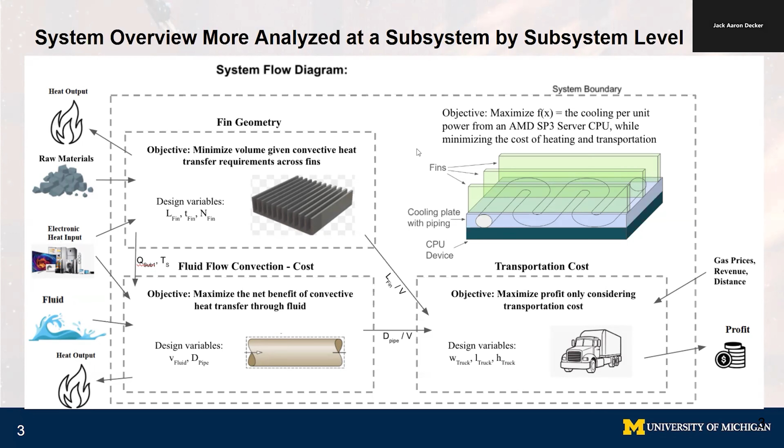Next up, we're going to talk about our optimization model. Here's a hierarchical decomposition of the transportation and heat transfer system. We have the two lower level subsystems, fin geometry and fluid convection, leading into the transportation subsystem, which gives a profit. We have a target profit set, and we're adjusting that.

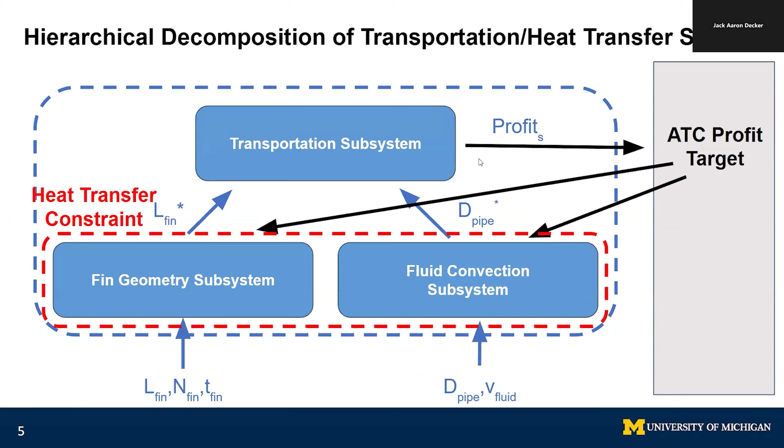We're taking that response and adjusting our two lower level subsystems accordingly. We'll talk about this in more detail later. For now, here's a breakdown.

We have our transportation subsystem, with our profit target that we're setting, and our response, which is our observed profit. Design variables are L-fin and D-pipe, which are outputs from the lower two subsystems, which have local design variables: L-fin, N-fin, T-fin, V-fluid, and D-pipe.

Our response to that is categorized here by L-fin star and D-pipe star. And our design variables up top are for the whole system.

Our ATC objective function consists of three terms, basically one for each subsystem. We have weights associated with the geometry and convection subsystems, just to tune those. Basically, each phi function is trying to minimize the target to response variables.

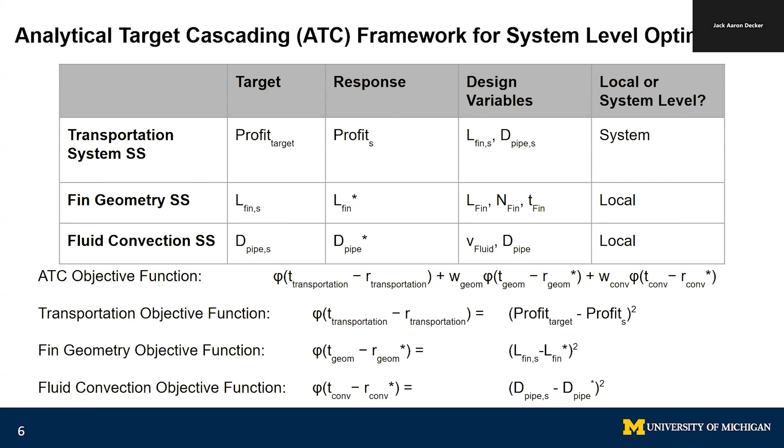More mathematically explained here, we're trying to minimize the ATC function, which we just plugged everything into above. We're subject to the constraints of heat transfer, which we'll develop as a surrogate model a little bit later.

We also set profit equal to this term here, based off of two terms: revenue and cost of carbon emissions, based off of L-fin and D-pipe. We just set each of the terms for one in this example. A theoretical format is explained here.

Our objective constraint trade-off: the objective seeks to primarily optimize profit, especially given the weights that can be tuned for L-fin and D-pipe. The weights being lower would put a lower emphasis on the heat transfer constraint, so the company can choose to optimize more profit at the cost of the quality of the product, though that's not necessarily recommended. That can even be flip-flopped if you want to.

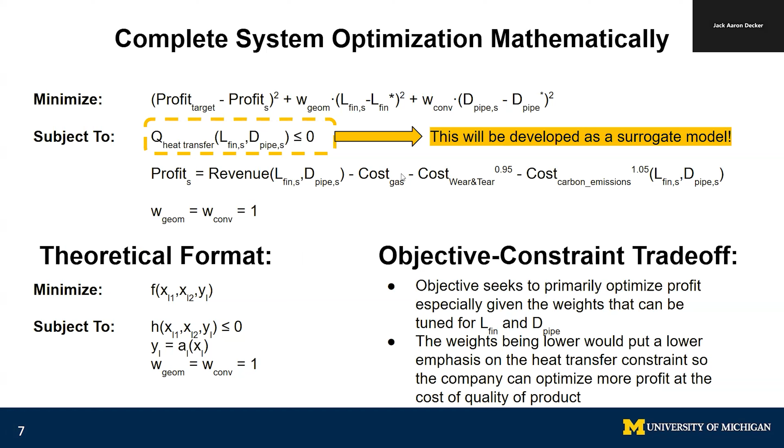This table reviews some of the differences between system level optimization versus subsystem level optimization. First, at the system level, the primary goal is simply to optimize profitability while balancing and ensuring heat transfer parameters are still met. At the subsystem level, each design variable is optimized locally and then passed along to the final subsystem, which creates suboptimal performance from a broader perspective.

Additionally, at the system level, the weighting of the design variables is malleable, various variables are backpropagated, and heat transfer is handled at a system level, all of which allow subsystem 1 and 2 to contribute in the most efficient way towards improving profitability. In the subsystem level optimization, each subsystem was internally trying to optimize and pass along variables, which created a strong design but left room for it to become even better.

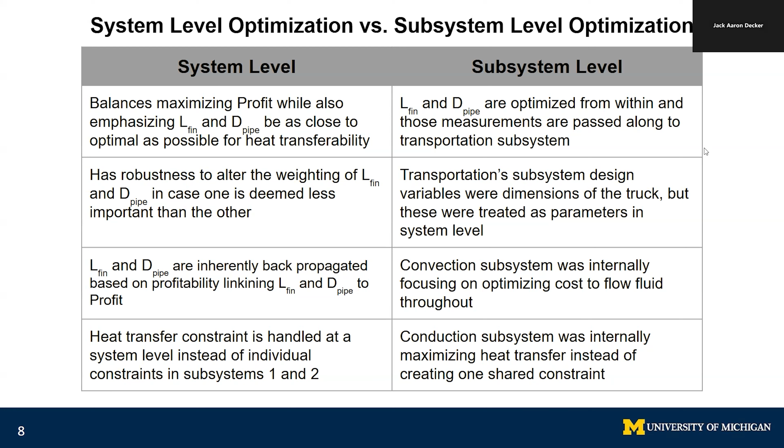This slide gives a list of all the parameters used in our model. These are taken from each of the subsystems and compiled for use in the system level model we have built.

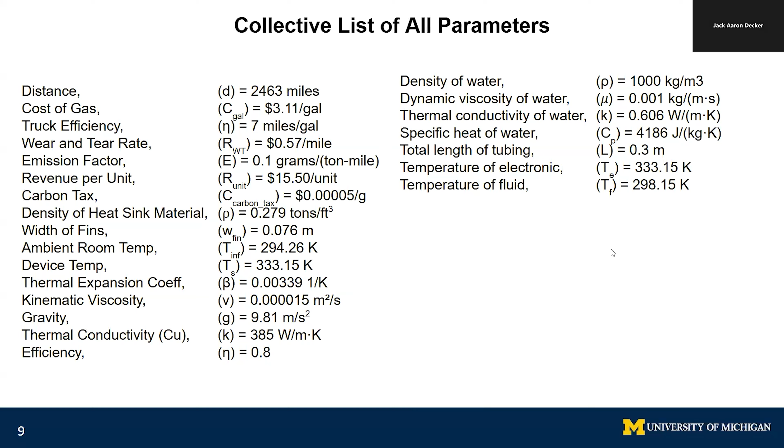We will present the mathematical modeling we performed with the use of these parameters, along with the design variables and constraints we selected next. Next up, we're going to talk about the mathematical modeling.

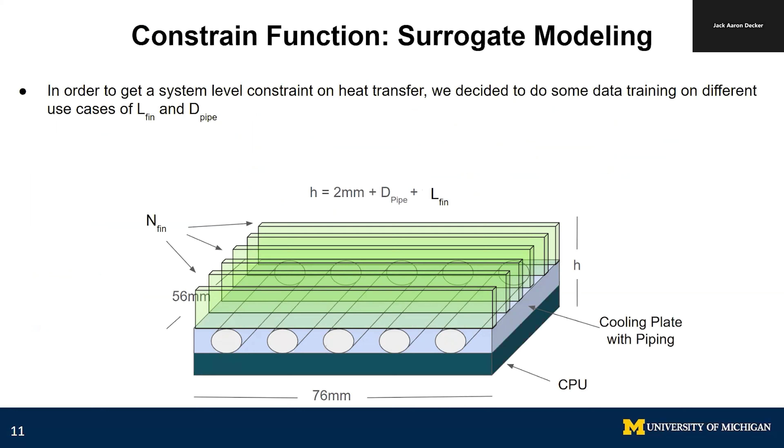To start, we'll talk about this constraint function. We did a surrogate model for this. Here's a visual of our heat sink. We're keeping the base area dimensions the same, and we are changing the height, which is based off D pipe and L fin.

To do this, we created training data from heat transfer theory, which we'll talk about more in future slides. We took various combinations of L fin and D pipe and calculated what the Q allowable would be.

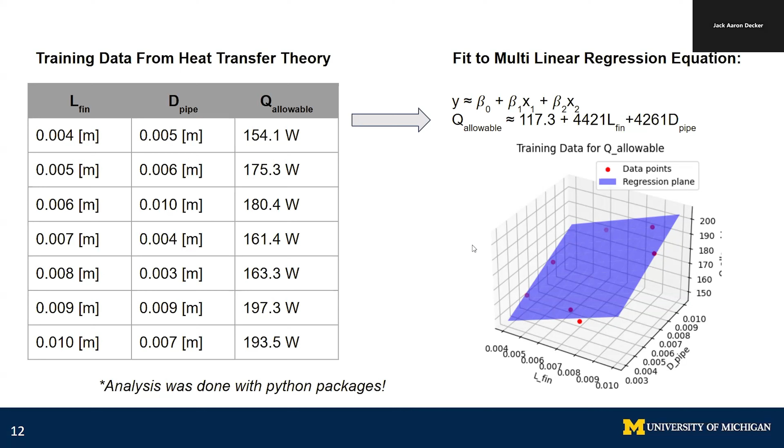You can see our data points are not too far off, so that's good that there's no major outliers. We held back 4 points used for validation, same process there. We calculated accuracy based off this formula, calculating the mean squared error and the mean absolute error, and we get an accuracy value of 97.31%, which shouldn't be too surprising considering all of this is just from heat transfer theory.

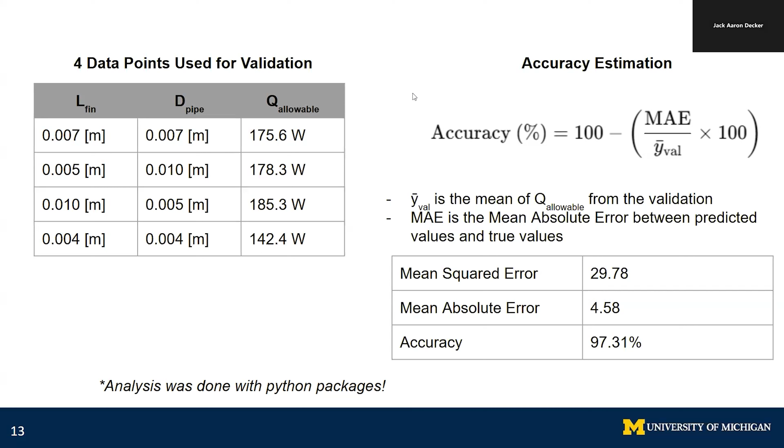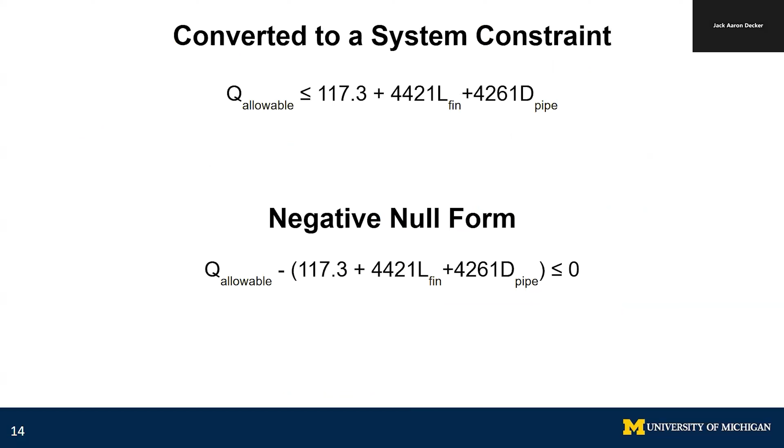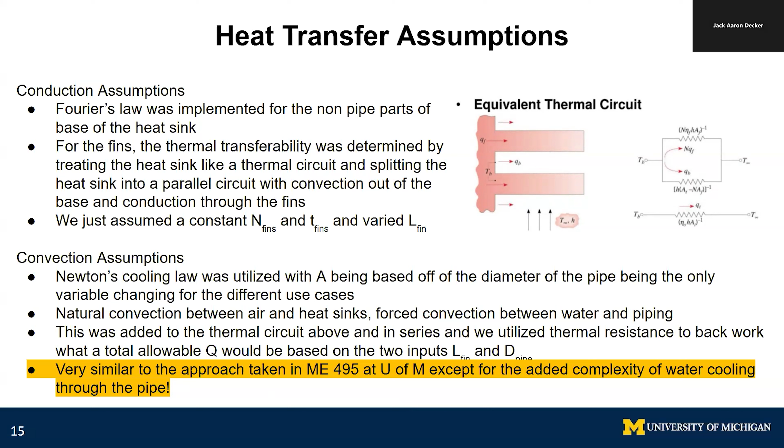Using our knowledge of other classes at U of M, we were able to make the following assumptions. Using Fourier's law and Newton's cooling law, we were able to model our system such that it would only require two inputs, L fin and D pipe, in order to back-work the total allowable heat transfer we wanted for our system.

Here's a blown up image of our assumed thermal resistance circuit.

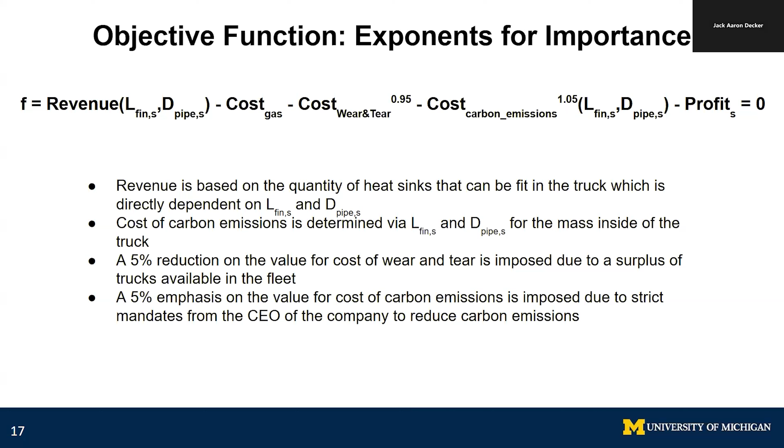Here's our objective function explained. Like I said, the revenue and the cost of carbon emissions are based off L fin and D pipe, with some reasoning in the first two bullet points. We put a 5% reduction on the value for the cost of wear and tear due to the surplus in trucks we had available in this fleet in our scenario, and a 5% emphasis on the value of the cost of the carbon emissions due to our company's commitment to lowering that.

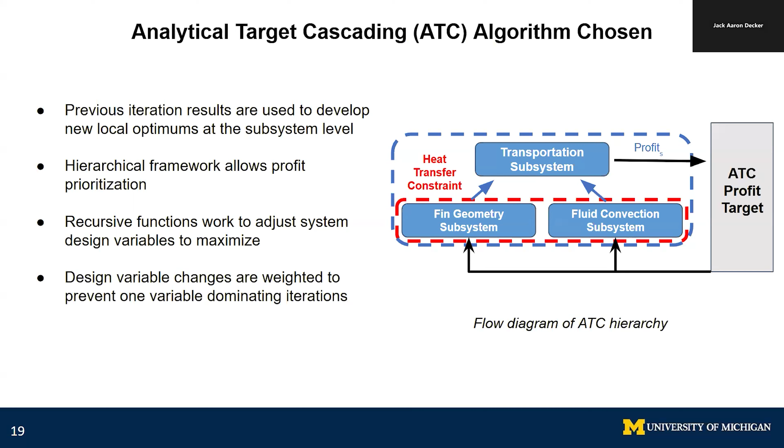Then those values are inputted into the transportation subsystem, where the ATC algorithm adjusts the design variables to maximize profit. The iterations continue until an optimal state is achieved within the boundary conditions. Also, the optimal design variables in each iteration are weighted to prevent one variable from dominating further iterations.

As for the execution, we decided to use MATLAB for this. To do this, we set the target profit to be very, very large, essentially making it a maximization problem. Also, each time a new iteration occurs, the values from the previous iteration acted as initial conditions for the next iteration.

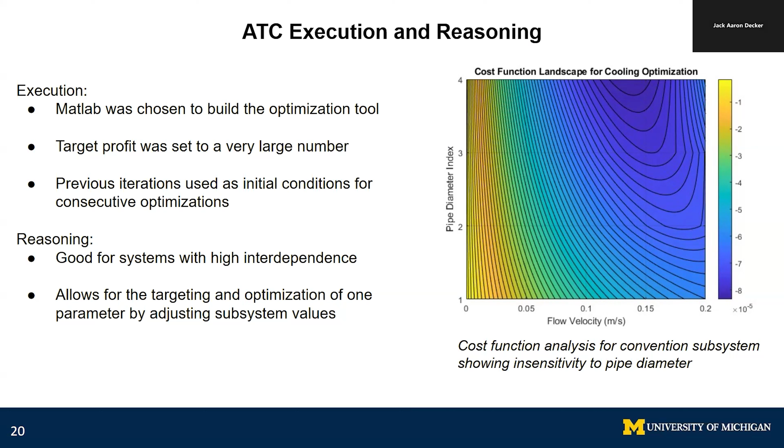As for why we decided to go this route, this hierarchy format and ATC allows focus on the optimization of one target given multiple interdependent subsystems, which is perfect in our case to maximize profit.

So onto the optimization results. The algorithm successfully seemed to adjust the subsystem optimal values out of what they would have done individually to optimize for overall profit while still satisfying constraints and delivering sufficient cooling power.

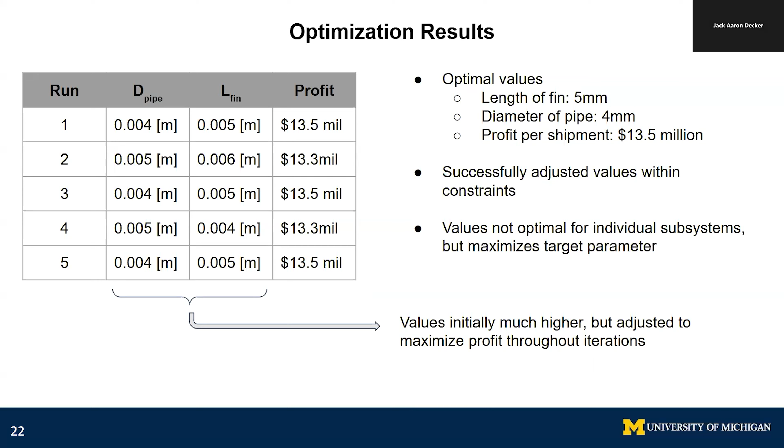The optimal values achieved are noted here. It was interesting to note that the highlighted values were always high at the beginning of the iterations, but gradually decreased to maximize the system profit as iterations went on. The optimizations seemingly reduced the overall size of the heatsink to just barely deliver the minimum cooling power required to maximize the number of units that fit into one shipment, therefore maximizing profit.

Moving on to post-optimality sensitivity analysis, we ran two sensitivity analyses to test design robustness. Parameter sensitivity perturbs the actual design variables, fin length and pipe diameter, slightly above and below their optimized values. For example, changing fin length led to a profit swing from 12.9 million to 14.1 million, a 9.1% change. Pipe diameter showed a 7.3% change.

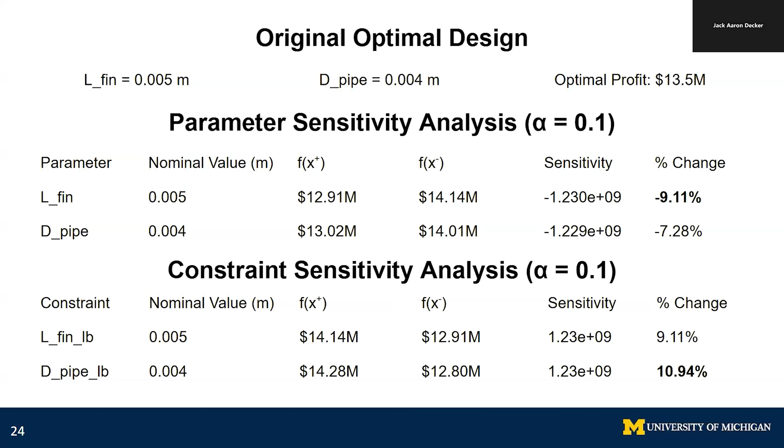Constraint sensitivity, on the other hand, perturbs the bounds of those variables. Since our optimal design hit the lower bounds, we tested what happens if we shift those lower bounds. Loosening the bounds improved profit by 9 to 11%, while tightening them reduced feasibility.

Now we'll get into the results. We first wanted to do a reality check on the results from a mechanical standpoint. A small pipe diameter increases both the pressure drop and heat transfer coefficient, but in practice it can cause clogging, require custom manufacturing, and could result in laminar flow, which is less effective for heat transfer. But this trade-off is still reasonable given the low power input to the chip.

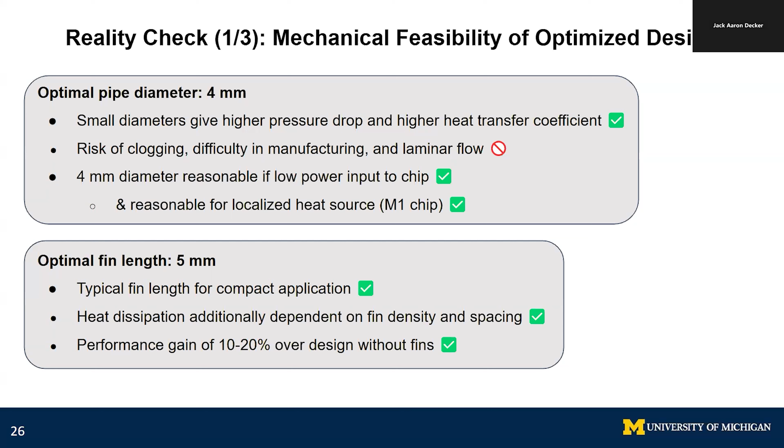For the fin length, 5 millimeters is appropriate for compact applications, especially since the total heat dissipation also depends on fin density and spacing, not just length.

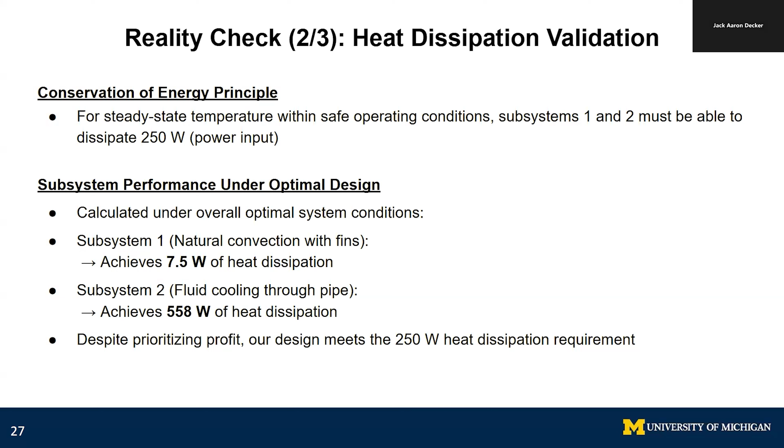To validate our results, we recalculated subsystems 1 and 2 using the optimal fin length and pipe diameter from the system level model. Subsystem 1 dissipates about 7 watts through natural convection, and subsystem 2 dissipates 558 watts via fluid cooling. Combined, the system capacity is well over the 250 watt minimum required for safe, steady state operating temperature.

To further sanity check our design, we found various other heat sinks on the market that were similar to our own. Among the devices that we found, our device was very much in the middle of operating capacities amongst these.

In comparison to the DigiKey heatsink, our design is slightly larger and has a greater cooling capacity. The fins are very similar in length and spacing to this device, which indicates to us that our calculations were well within reason. On the higher end side of heat sinks, we found a high performance liquid cooled heatsink that is just slightly larger than our own.

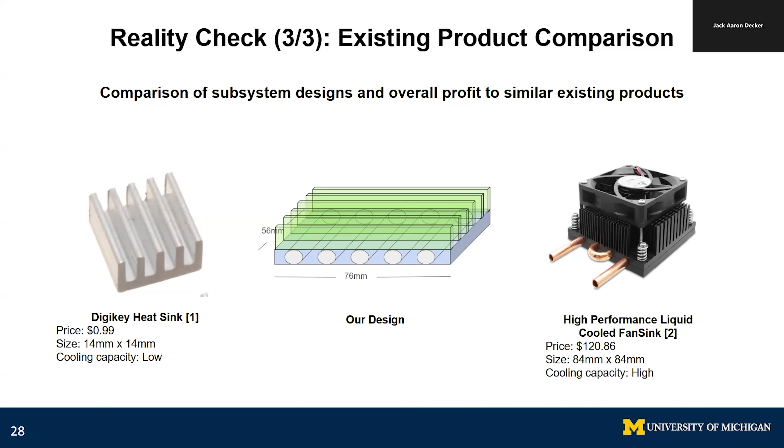This is similar to our device in that it contains both subsystems that we tested, but additionally makes use of forced convection with a fan and is an all around higher end device. This comes at a trade-off of cost, and given our CPU cooling requirements, we believe having a custom sized device in the middle range of cooling capacities makes a lot of sense for us.

When optimized independently, each subsystem selected larger components to maximize its own heat transfer performance. But this approach overlooked crucial transport constraints. In contrast, the system-level optimization, guided by analytical target cascading, chose smaller, more balanced component sizes. Despite the downsizing, the system still met its performance goals and delivered strong profitability.

This clearly highlights a key insight. While subsystem optimization can lead to locally optimal solutions, only system-level optimization achieves the best overall outcome.

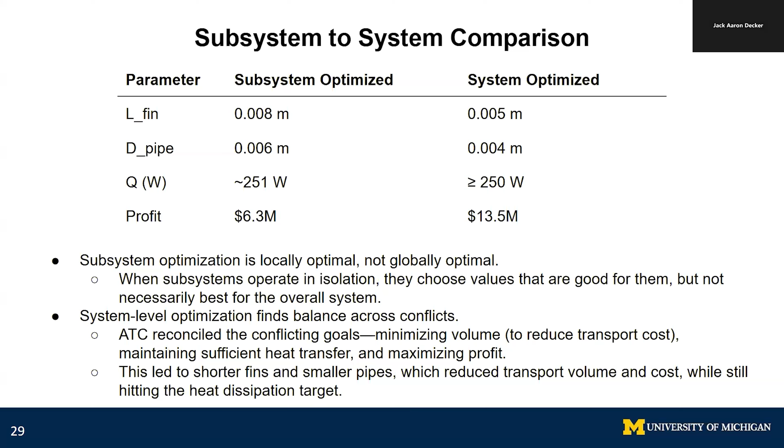Now we'll go over high-level engineering interpretation of both the key results and the sensitivity analysis. With subsystem-only optimization, we selected larger fin lengths and pipe diameters to maximize heat dissipation. But in reality, we only need to meet the minimum thermal requirement, which we've shown that we can still achieve while maximizing profit.

The sensitivity analysis confirmed that fin length and pipe diameter significantly affect profit due to their impact on transport cost. This also reinforces the value of ATC, which enables strategic trade-offs across the system.

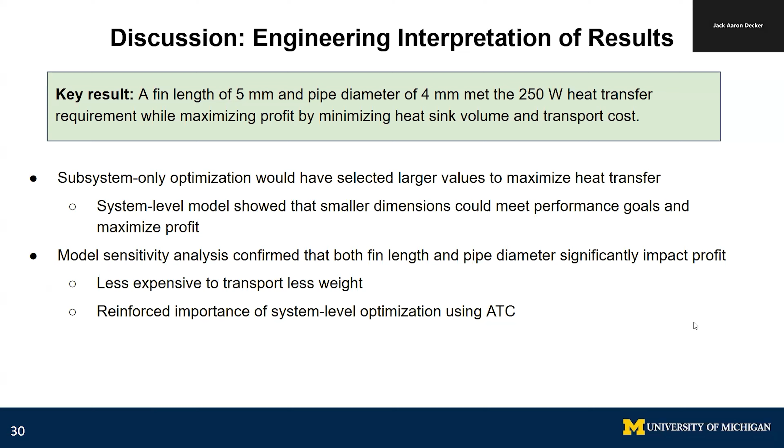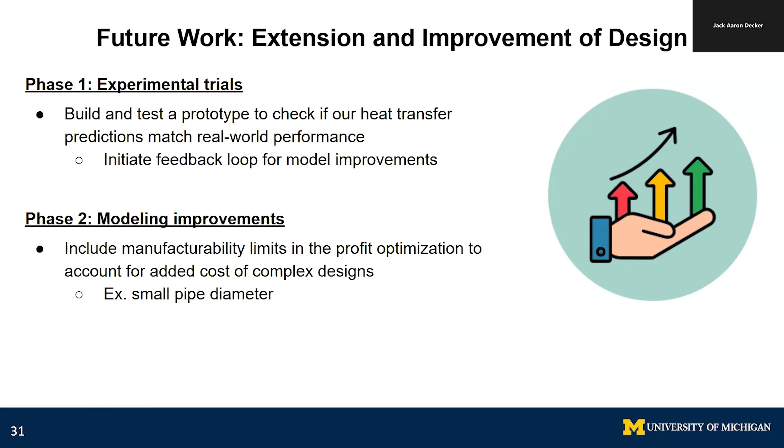Some possible next steps for us would be real-world experimentation with this prototype to further validate the model, as well as model improvements, including manufacturability limits, since these affect real-world costs and are not currently included in the profit equation.